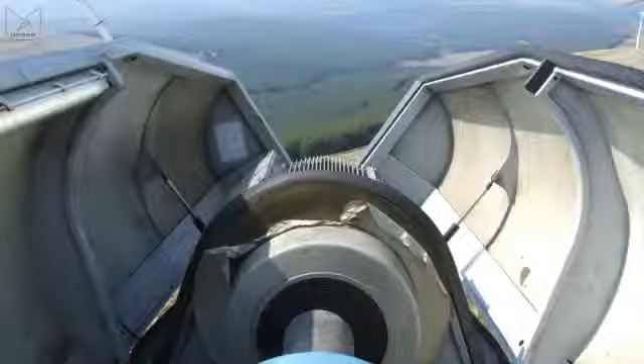Welcome. In this video, we'll show you the layout of a typical wind turbine generator as found on wind farms across the world. Now, exact designs do vary, but almost all the turbines in use today are horizontal axis machines, which have a three-bladed rotor spinning in a vertical plane attached to the front of a box which we call the nacelle, after the fairing around an aircraft engine. And in this nacelle we have the generator, often a gearbox, and occasionally a high-voltage transformer, and the whole thing sits on top of a tower, which is mostly there to keep the blades from digging a hole.

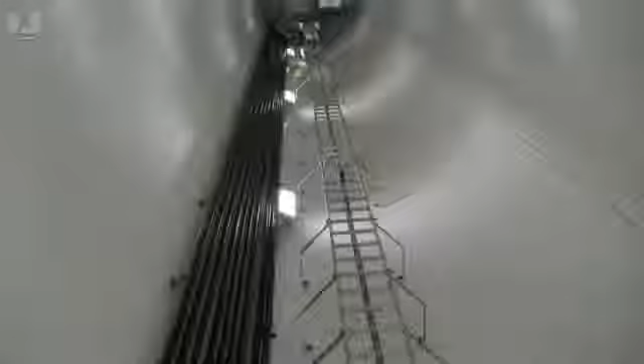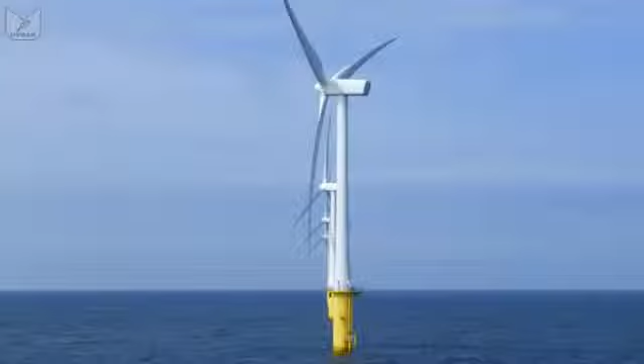We tend to class turbines by their power output, and hence their physical size. Wind farms might use many sub-megawatt turbines, each producing 400, 600 kilowatts, or a few multi-megawatt turbines, producing maybe up to 3 megawatts per unit. Apart from physical scale, they are arranged a bit differently, so let's start by looking at a typical sub-megawatt model.

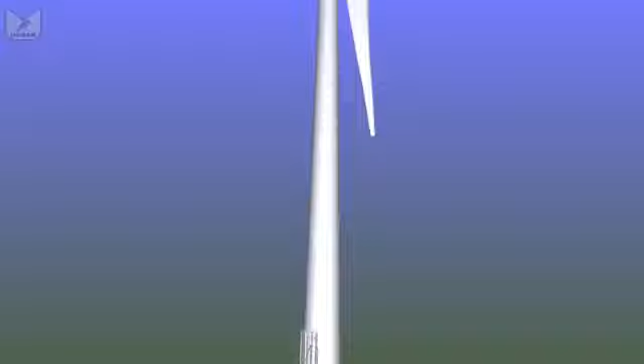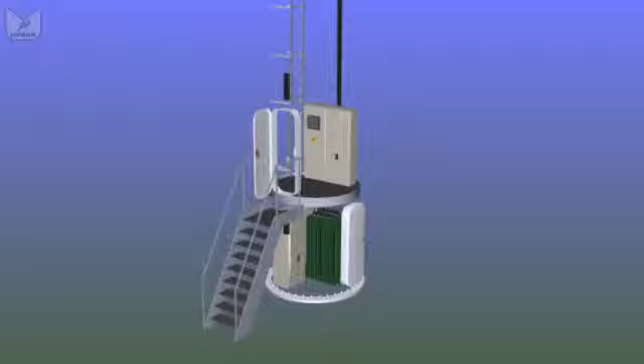Turbines of this type are typically 25 to 45 meters tall, and at the base you will often find two doors. The lower door takes you into a secured compartment where we have a high voltage step-up transformer. The generator at the top of the turbine is producing about 690 volts, and this transformer converts that into several thousand volts to send it more efficiently to the substation. The main entrance to the turbine is at first floor level, and there we find the control cabinet and the base of a ladder, or a series of ladders.

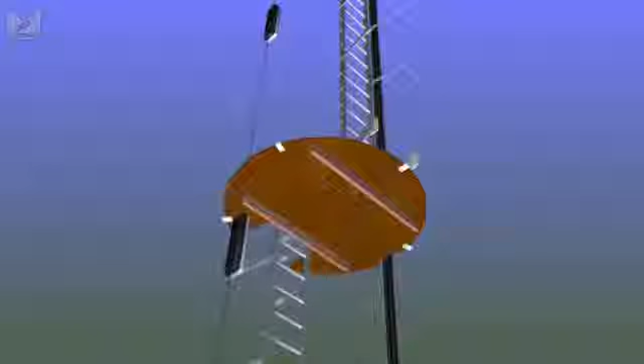Often in these smaller turbines, the ladders run to a series of platforms and they change sides at each platform to give you a rest area and a bit of fall protection. Platforms are generally just wooden discs suspended inside the tower walls, and they might have a trapdoor or a set of guardrails and a gate depending on how the ladders are arranged.

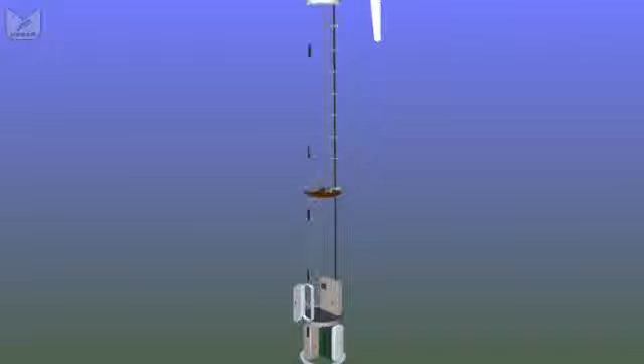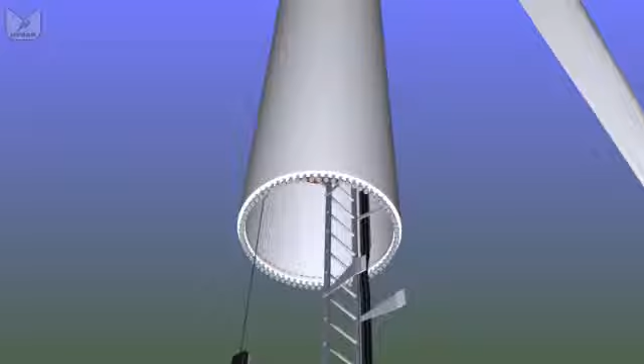The main run of cables goes up the wall of the tower, dodging past any intermediate junctions, because obviously the towers can't be delivered in a single 40-meter long section. They come in 20-meter long sections. They're bolted together with a lot of nuts and bolts. But as we move higher and higher through the platforms, they're getting slowly narrower and narrower, so the ladders are getting a little bit closer together.

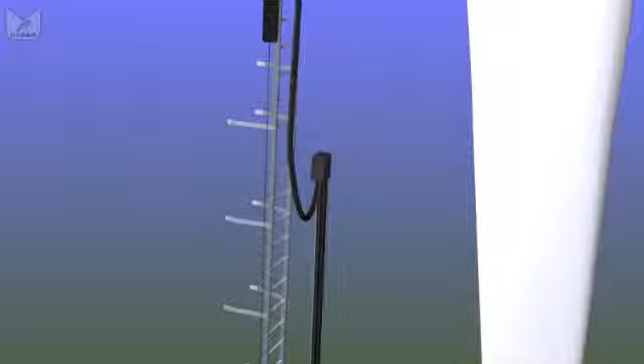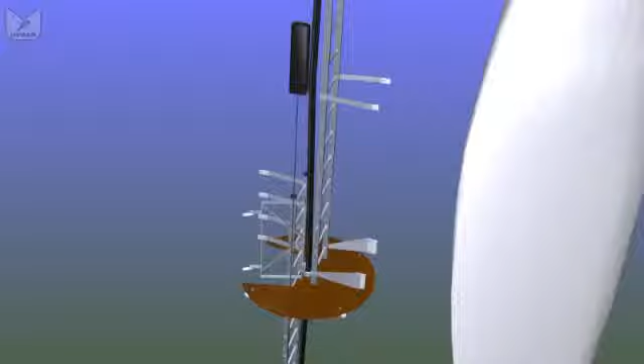But eventually the main cables stop being attached to the wall and they hang freely in the center of the tower, so they can twist as the nacelle rotates to face the wind. If they twist too many times, the nacelle will spin itself around to remove the twists. But as we move up, now the cable goes through a hole in the center of each platform, and at the top of the tower we have a steel platform with a sealed trapdoor, which we call the yaw platform.

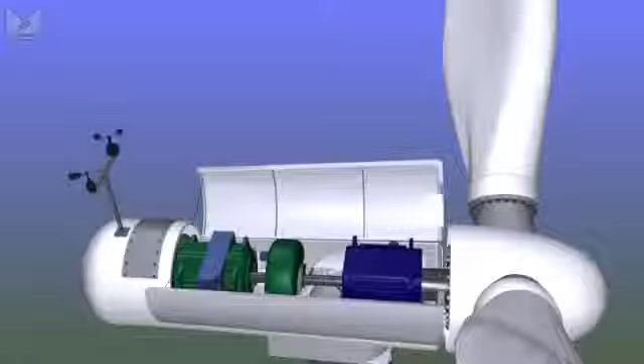Just above that we have the yaw ring with the bearings that allow the nacelle and the rotors to rotate around to face the wind. And this sealed platform acts as a bit of fire protection, also avoids people falling back down the tower, because at the top we simply have a hole through which we climb into the nacelle. And the nacelle in this case is a vaguely tapered tube. At the back we have the wind sensors, which give us speed and direction and allow the turbine to face into the wind and to change the angle of the blades.

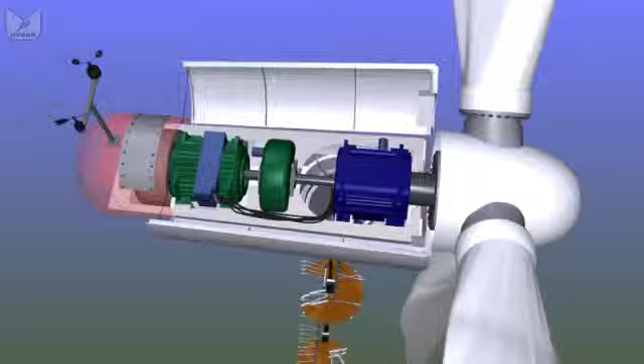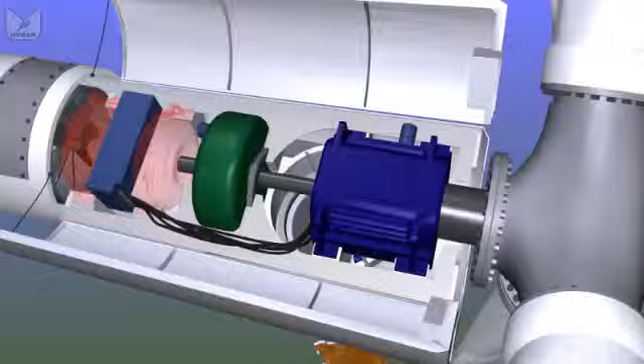The nacelle itself is just a fiberglass tube. At the front we have a similar fiberglass cowl protecting the hub, which is a steel casting on which we have bolted our three blades, and the blades can turn or pitch so that the angle they form with the wind can be varied. Out of the back of the hub we have a shaft which leads into the gearbox, then a high-speed shaft through a brake into a generator, and that generator then supplies the electrical power, as I say, at about 690 volts all the way back down the tower to the base.

And right at the back we have a cooling fan, as we're generating 500,000 watts of energy inside the nacelle. Some of that is wasted as heat, and without an efficient cooling system there is the potential for the turbine to catch fire. Now, the layout of a larger turbine is broadly similar, but some of the components are in different places, so let's start by looking at the tower section of a typical 2 megawatt turbine.

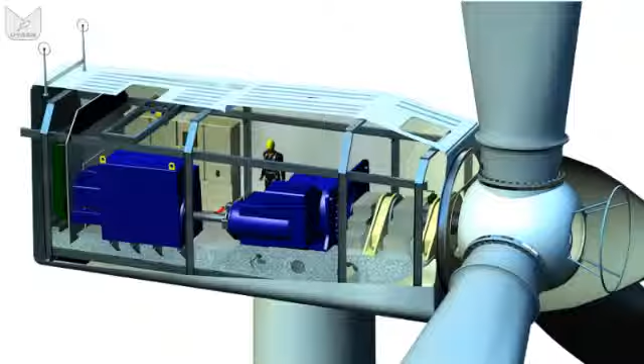Where we place the high voltage transformers in multi-megawatt turbines is a lot more variable. Quite frankly, we have a lot more room, so we can decide if they can be in the nacelle, they can be at the base of the tower, they can be on platform 1 in the basement, they can be outside in a hut. In this example, the transformer's at the top, so when we go into our door, the one thing we'll not find is a transformer.

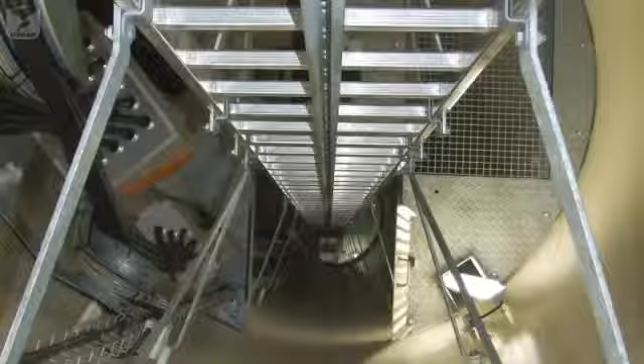We do have the high voltage switches, in this case on platform 2, but on the entrance platform we have the usual control cabinet and a lift, a little green box. And that lift will take two people to the top of the tower, or nearly to the top, without them having to climb the single, very, very long ladder. Almost all large turbines will just have a single run of ladder for the majority of the run up the tower. It will have a wire or a rail system, a fall arrest device fitted to it, but it is still a long slog up the ladder, which is one of the reasons why service lifts are so important.

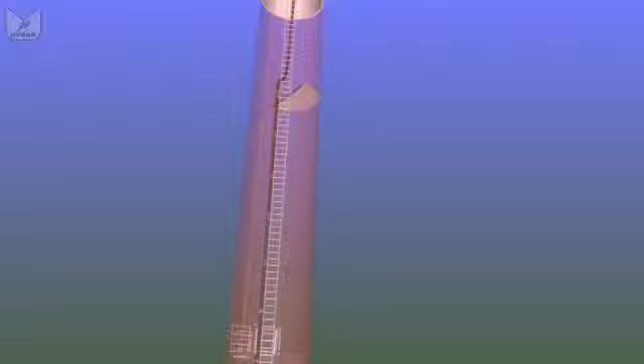And again, the tower's in sections so that it can be delivered around the country without demolishing villages. Sometimes, if we're running a long distance and we haven't got room for a proper platform, we can put a half moon in place. No fall protection on the platform, but we assume you would keep your lanyards connected at this point because it's quite a long way down.

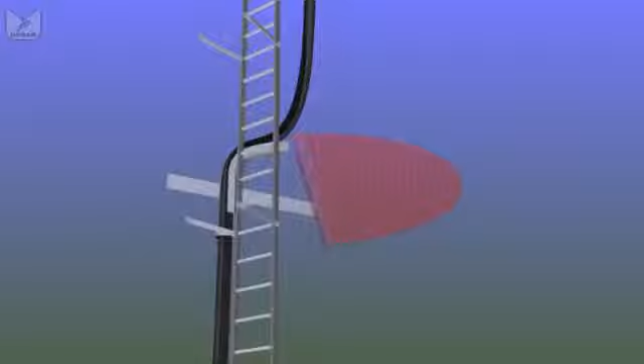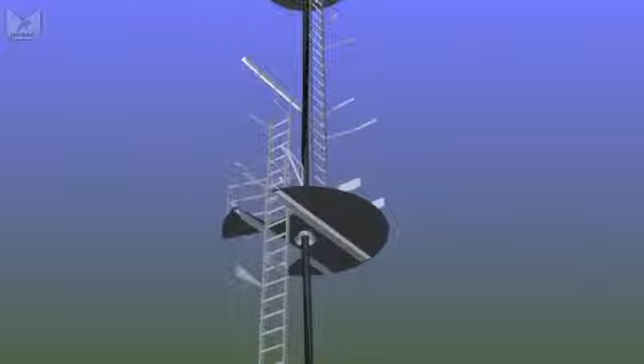The cable again breaks free from its mounting and hangs in the centre of the tower for the last 10-20 metres or so that it can rotate as the nacelle yaws into the wind, and the lift eventually runs out of space. Remember, the tower is getting narrower and narrower as we get to the top, so the lift tends to park itself about half a platform from the top, and we have a normal ladder which then leads to the yaw platform, and then it starts looking very much like the smaller turbine did.

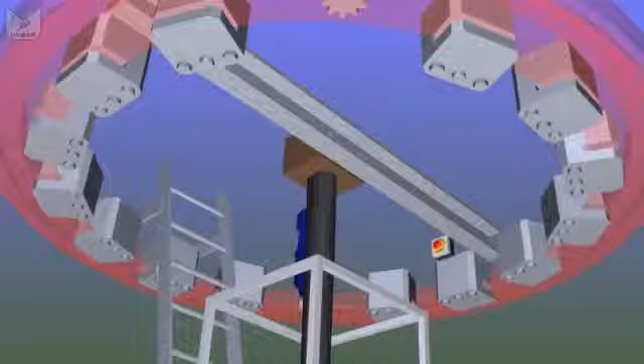We have a yaw ring bolted to the underside of the nacelle, joining it to the top of the tower. A series of disc brakes run around that yaw ring to lock it in position when the wind isn't changing direction, and when it is, we have a series of either electric or hydraulic motors that rotate the entire mechanism around on the top of the tower.

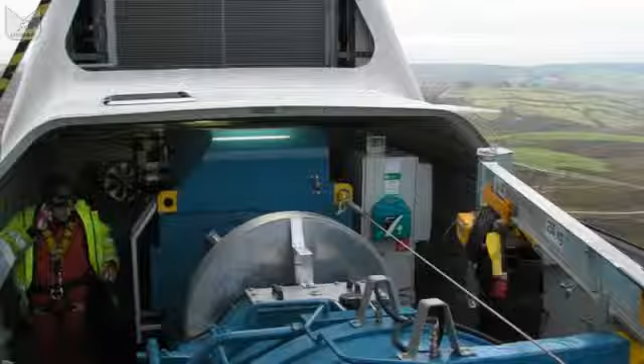The layout of a multi-megawatt nacelle is again more variable than for a smaller version. We always have to have a generator, but we may not have to have a transformer. In a few cases, such as the famous Enercon egg-shaped nacelle, we don't even need a gearbox. They're direct drive. We just have a shaft linking to a motor, and then lots of extremely complicated electronics to condition that power for connection to the grid.

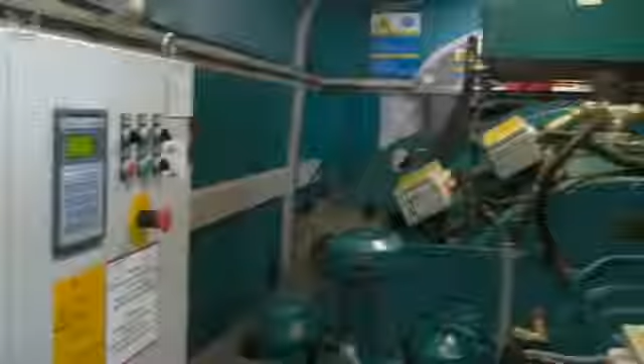But in most cases, we need the same as we needed in the small turbine. Gearbox, generator, possibly a transformer, all in a fiberglass box. And in our example, we're looking at a typical design used by a number of manufacturers where we have a nacelle that's 3 metres high, 2.5 metres wide, 7 or 8 metres long. It's a fiberglass box about the size of a site hut.

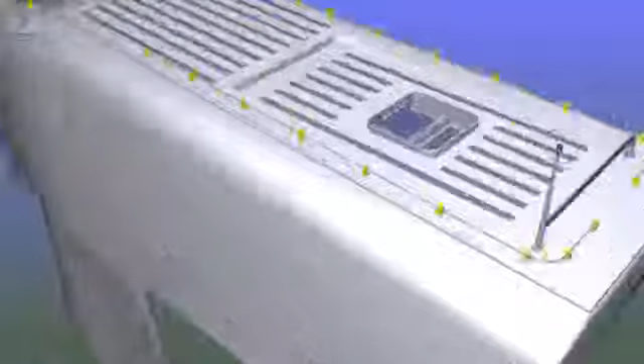As before, we have our wind sensors on the roof as far away as possible from the dirty air cast off by the blades as they spin round. This design is just a fiberglass box with a flat roof. We access the roof through a couple of skylights. Some designs are like before, big cylinder with 2 opening doors. Some have an entire roof section which opens, rather like an old camper van.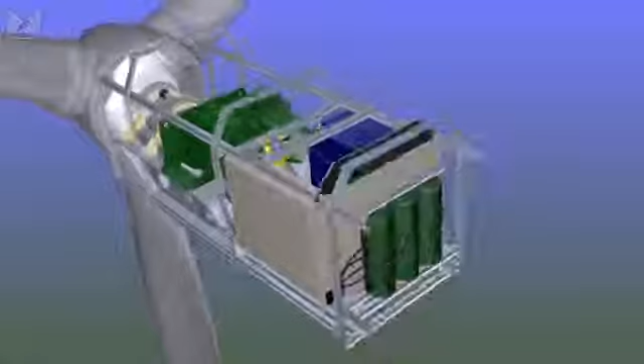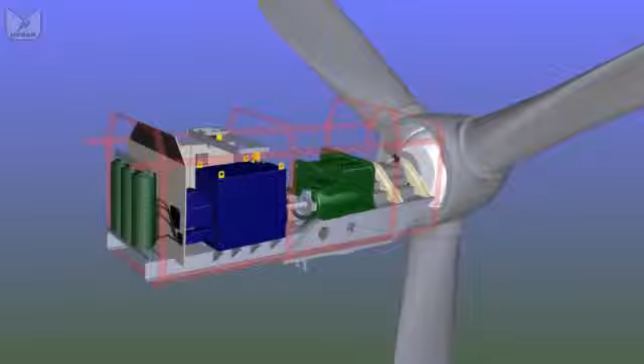If we take the skin off the box, inside we have the same kind of components we had before. They're just bigger, and there's a little bit more room, so they're laid out a bit differently. The only additional component up here is those 3 green cylinders at the back. That's our high voltage transformer, which used to be at the base of the tower. Now, we've removed a lot of the control systems and the hydraulic systems that would just clutter up the pretty picture. We've added in a bloke for scale, but most of the big components are still here.

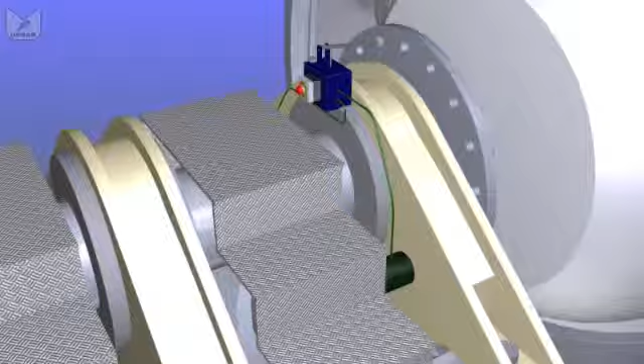If we look at the very front of the nacelle, we have a couple of bearings which support the main shaft, which is a hollow tube, 50, 60, 70 centimetres in diameter. It's hollow so that we can get electrical cables in through this main shaft into the hub to drive all the control systems inside the hub. And we have a couple of pins on the first bearing that lock the main rotor in position if we need to access the hub. It's a safety feature. If you're in there and it starts rotating, it gets scary.

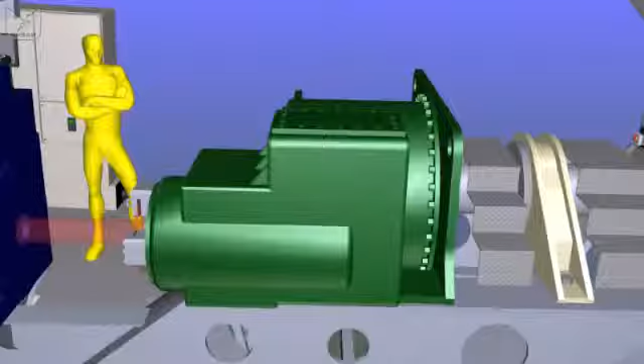So our main shaft drives our gearbox, which is mounted centrally because it's often the heaviest component. Out of the back comes a high-speed shaft, as before. That's where the braking system is. The high-speed shaft then drives the generator, which is usually oil-filled. The generator then supplies 690 volts, in this case into our transformer, which is sitting right next to it. That high-voltage signal then passes through the switchgear and the cabinets, down the dropper cable, straight down to the bottom of the tower, through those switches on platform 2 and off to the substation. And that, as an overview, is pretty much all there is to it.

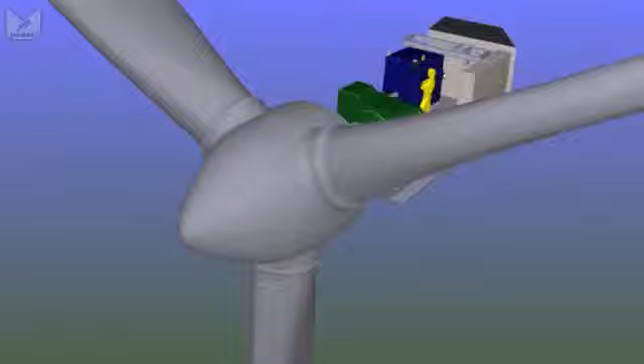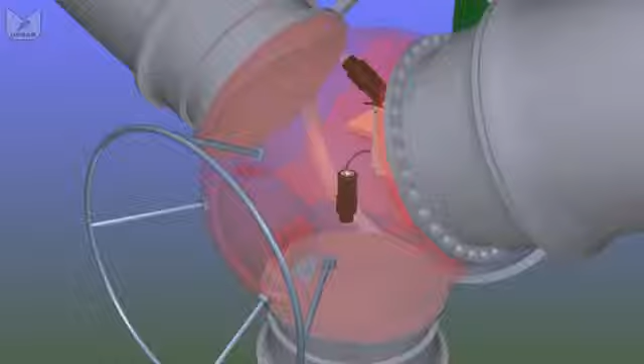The only thing left to talk about are the blades, obviously, which actually do the work. We still have 3 of them. They still pitch, in other words, they twist on themselves to line up with the wind. And you access the hub through the gap between this fiberglass cowl and the cast hub. It's a bit of a wriggle, but you wriggle through, usually feet first, crawl through the hole in the middle of the hub, and inside the hub we'll find the control electronics, the pumps, the motors and the batteries to control the pitch of each blade, rotating it on its own bearing to set the optimum angle for the wind.

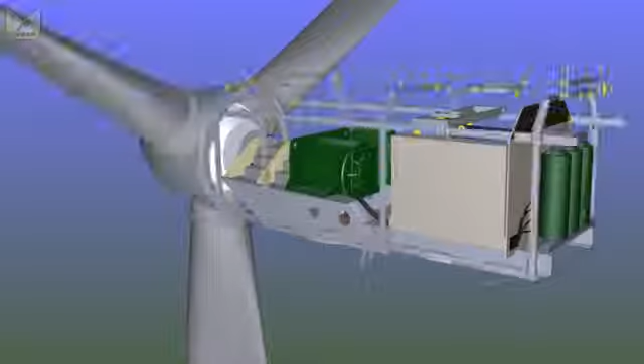If we turn the blades through 90 degrees so they're edge on to the wind, there's no net turning force. It's a process called feathering, and the turbine will stop. Obviously there is a vast amount more going on inside a turbine, lots of wiring and control systems and lights and sensors and fire extinguishers, etc. But that is basically it, the general overview of most turbines that you find on wind farms today. Designs for the future will be significantly different, but at the moment, it's a windmill on a stick.